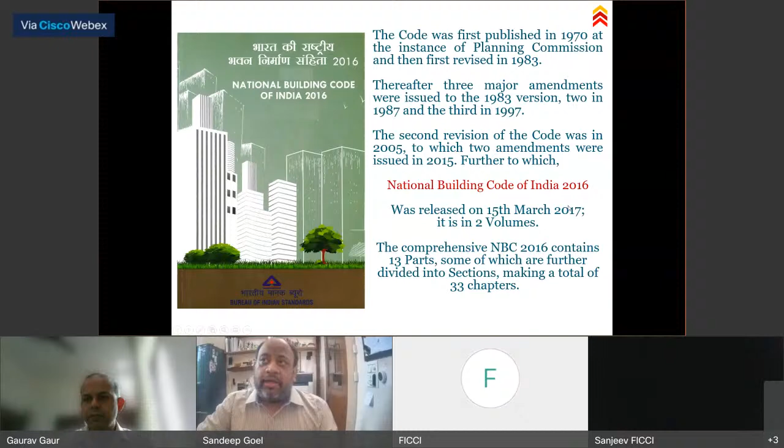The very important thing about the NBC is that we now have huge documentation with respect to figures. We were earlier with 6 figures, and today we are on 16 figures and diagrams in the new revision. We had a 3-plate terminology, and we have now moved to a 6-plate terminology.

When I started working on this, in discussion with colleagues, we realized that terminology is such an important part in fire engineering. People sitting in India, architect colleagues, used to say fire corridor, fire path, fire route.

If we start using these kinds of terms, they are not globally recognized. So we have to start using terminology which is more correct with respect to the global way we talk. That's what the code looked at in improvising the terminology.

Terminology is English. If you do not know the right terms to use in a conversation, your system is not going to work. All of us know software to some extent. If you do not use the right syntax in making software, the computer does not give you the right outputs. Similarly, engineers, architects, users, and system integrators have to use the right terminology.

We also realized that India is a moving country, and we now have atriums, commercial kitchens, car parking facilities, metros. So now it is time that these important occupancies in buildings come up with their own requirements highlighted. So the code committee intended to include more annexures, what you see on the screen.

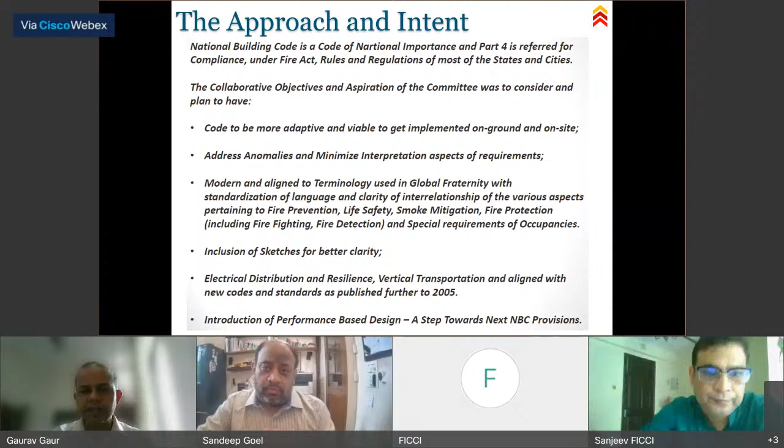Gauravji, what time should I stop? Can you tell me the timeline so I keep my watch? Yeah, sure, so as per the agenda, you have to finish by 2:40. So from 2:40 we can take some questions.

Thank you, Gauravji. So this brings better clarity towards the speed we have to talk about. Now you see the code is very clear with its objective. We have talked about fire prevention, and in fire prevention, the code looks at 3 basic fundamentals.

Fire prevention means you should do a system with which, to begin with, fire should not occur in the building. That means you should do the right electrical design, use the right materials in the project, and use the right type of structural rating into the project, so that by and large the fire itself is prevented, is not happening in the building.

Now, these are various things with which you can prevent fire from happening in the building. If you are not storing combustible material, you are using the right type of gas distribution network, you are using the right type of interior finishes, all those things will prevent fire. An inefficient electrical distribution system is one of the biggest culprits where fire occurs because of poor electrical design. But if you are doing a good electrical design, your fire will not occur.

Now, God forbid, the fire occurs. The next thing to look at is life safety. We should not lose human life. People's life is valuable. We all realize, specifically COVID has made us realize how valuable one life is, and what kind of grief it brings to the family if we lose a person in such a calamity. So life safety is very important. Most of us take it for granted that we are safe in the building, but life safety is one of the most important things. In the blueprint of the design, if life safety is not handled carefully, it will affect the functions of the building.

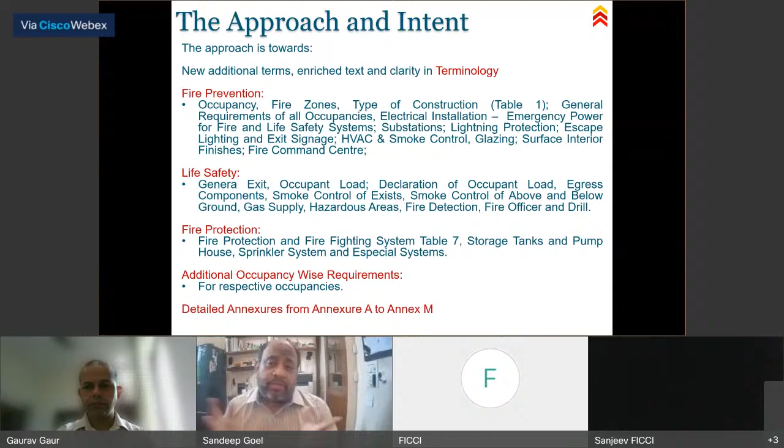Now, having said that, the NBC also gives very good importance to audits and drills. If you do not do the audits and drills correctly, it's like not being careful about your own health—if you don't do a blood sugar check or keep track of your heart condition, you can run into a problem. Similarly, the NBC has specific requirements for audits, drills and evacuation, with additional requirements for high-rise buildings. These are some of the best things built into the NBC.

So as a stakeholder, I think it's our duty to also look at the guidelines for evacuation and keep practicing them in our day-to-day activities. But what is the real picture?

So when you're in an aircraft, from the pilot to the air hostess to the people on the ground, all of them are responsible for the safety of the aircraft, not just the pilot. So you don't just say the architect is the one who's going to take the lead—I think everybody contributes in their own significant ways to make the building safe.

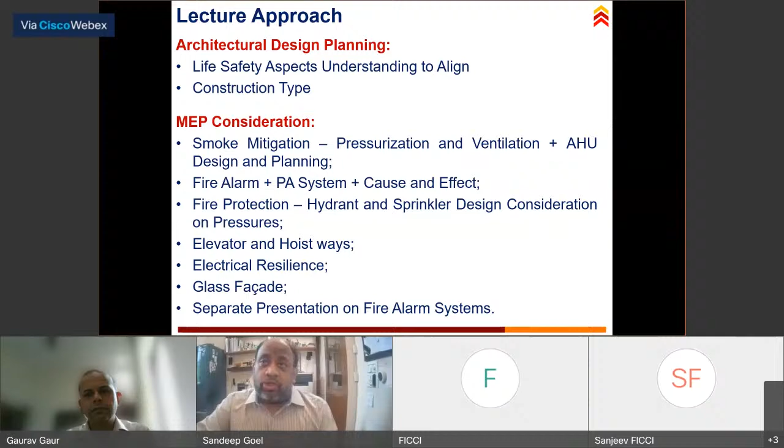So I think as passionate stakeholders, a lot of us talk about smoke mitigation. A lot of my colleagues always talk about smoke being the biggest killer. I think, to my understanding, a wrong announcement, an incorrect announcement, or not making the announcement at all is a bigger killer than the smoke itself. Because if you are able to provide the right type of announcements, you are able to control the human movement into the building. Now, once you are able to understand the life safety aspects, then there are active system aspects.

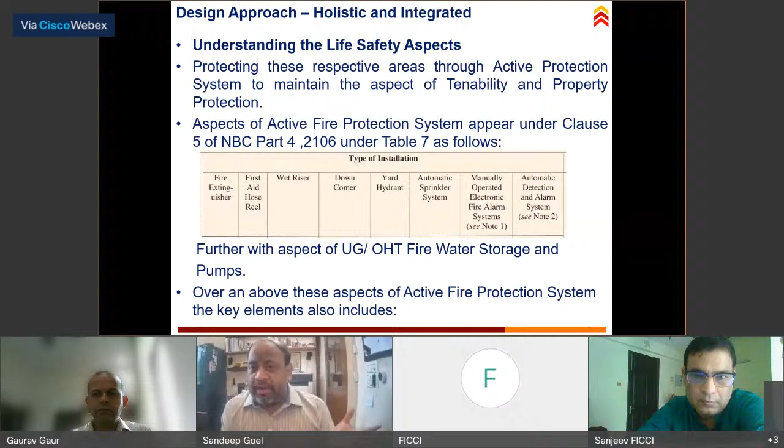Life safety as far as active systems in the code is concerned is much easier. It's a prescriptive requirement: go to table number 7, check the type of occupancy, check the height of the building. There are different types of installations - extinguishers, hydrants, sprinklers, the type of fire alarm system you have to provide. Put all of that together and you can find out the active systems which have to be provided in the building, which the National Building Code very clearly highlights.

Of course, we do talk about electrical safety. One of the other topics which I feel we should be very passionate about is emergency lighting and exit lighting. We take these things for granted, that emergency lighting or exit lighting has no value in a building. But believe me, when you are in a building and there is complete darkness because of a fire which might happen, the only saving grace in an auditorium is that exit light on top of the door. That's the most valuable thing to see in that auditorium.

Similarly, in any facility, if your exit lighting is not correctly placed, believe me, at that kind of time the only safety you can get is by knowing the passage which will tell you where to exit from. So these are some of the things.

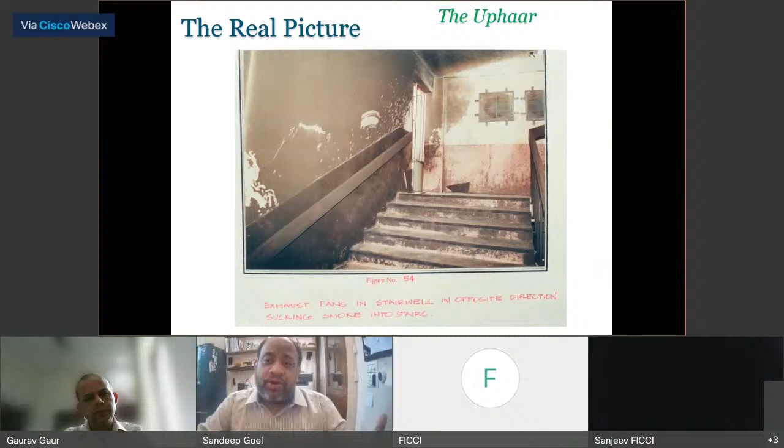You see this Uphaar tragedy which happened. In this Uphaar tragedy, the engineers were told you have to pressurize the staircase. Now, when you have to do the pressurization of a staircase, what do you do? Provide a fan. So the engineers, in their wisdom, provided the fan in the opposite direction. They just knew that you have to provide a fan. So they provided a fan in the mid-landing of the staircase, Gauravji. It led to the smoke from the auditorium being sucked into the staircase. So it was, in fact, a reverse of the damage you should have prevented.

So these are some of the things.

Another classic example: if you have a fire door and you keep a door stopper on it, the fire door has no meaning because fire from that space will enter the staircase. We realized these problems, so the National Building Code introduced a warning that a fire door should not be kept on door hold open. It has to be closed. Door stoppers are not allowed, because people did innovative things like providing a door stopper on a fire door, defeating the whole purpose of providing a fire door.

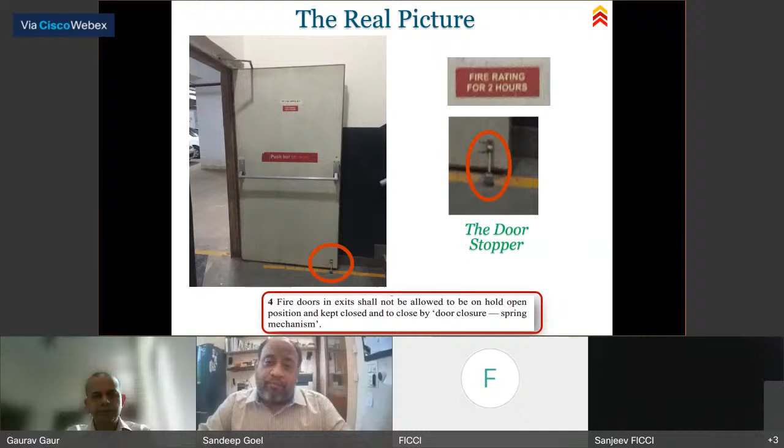If you look at an exit, in engineering terms it's a staircase. The architect must provide the right number of exits, their width, and their locations. The structural engineer provides the right structural integrity to the staircase for people to use it for 2 hours. The interior designer uses the right materials for construction inside the staircase. The mechanical engineer pressurizes the staircase to ensure smoke does not enter. The electrical engineer provides lighting inside the staircase so you don't topple or fall down. And the firefighting engineer provides sprinklers and seals these spaces so no smoke enters.

So all these stakeholders are contributing together to the safety of the staircase. Can we say we don't need one particular person on the project, that we can manage without them? It's like working together for the success of the project. An electrical engineer is as important as a structural engineer, who is as important as an architect, because when everybody gives their contribution, we meet our objectives.

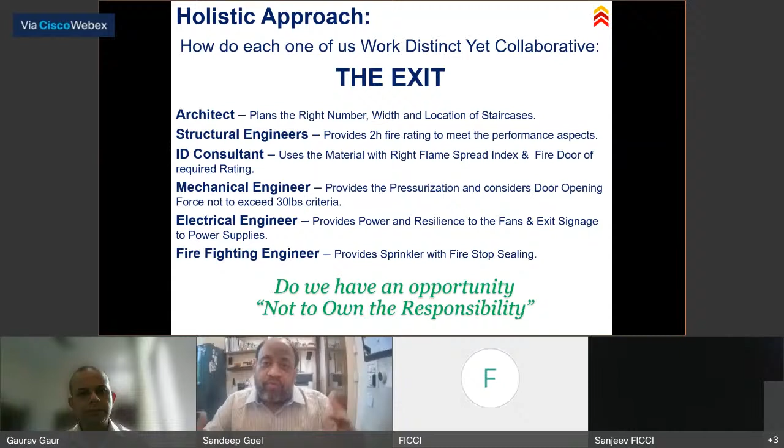I'll take you through the fundamentals of fire safety as per the National Building Code of India. We have something known as exit access. What is exit access? You are in a building, working in your office on a computer, or inside a restaurant eating food, or imaginably in a school studying. You are in a space where everybody is collaborating and working together.

But when there is a whistle during a fire drill and you have to move out of the building, what do you do? From the space where you are working on the computer in your office, you start walking to what we call the exit. And what is an exit? The exit is this red box - it provides you the complete mechanism to come out of the building from the 14th floor to the ground floor. So I always narrate that an exit protects you like your mother and brings you from the space of concern to the ground floor, protecting you from all eventualities of exposure to fire. As per international codes, if you're in a building on the 18th floor, when will you be safe?

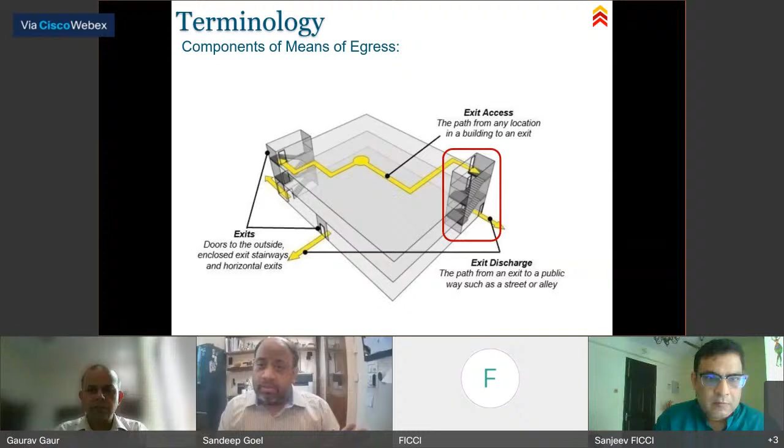The answer is: you are safe when you are inside the staircase. Very simply, if you are able to go from your office where you're working on a computer and walk across and enter the staircase, you are in a safe zone - as long as that staircase door is closed and not open. So what happens is you leave the evil behind; you get into the staircase, the door closes, and the evil, the monster, is behind you, but you are in that safe zone from where you can come down to the ground. That's why we should learn to respect the exit.

If you put LPG pipelines, mattresses, go and smoke in the staircases, and leave cigarette butts over there, those staircases will not help you at that juncture when you need them.

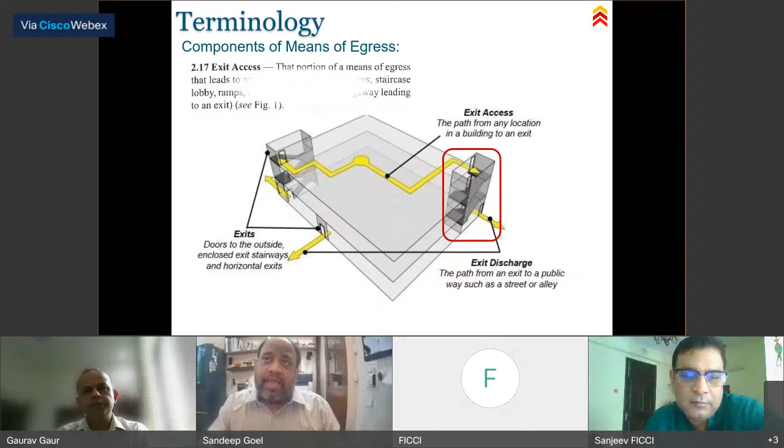They will become actually incapable to bring you to the ground. So in that spirit, this is the staircase, as long as you are able to reach the staircase from your place where you are, in the safe zone.

Having said that, the National Building Code further describes that if you have got 10 staircases in your building, out of 10, 5 staircases should go directly outside or use a passage to go outside. Today, you go to many buildings, when you come down on the ground, you land into the lobby.

Now, Gauravji, I'll ask you, God forbid there is a fire in the lobby. Where will you go? You are already into a space which is on fire. So let's imagine that you have got staircases, what you see on the diagram, are able to go out.

In case there is a fire in the lobby, the PA system announces for people to use the staircases by numbers. Staircase number 3, 4, and 6 to be used, please go out. That time you prohibit or discourage people from using those staircases which, if they come to the lobby, will have eventuality of people being exposed to risk.

So as I said, if you name your staircases Saraswati, Vandana, and Varanasi, you are able to say, please use right now these staircases for exits, because the staircase which brings you down to the ground has risk exposure. You are able to make a more effective PA communication. So that's how the whole thing has to work, not just on blueprint, but in practice.

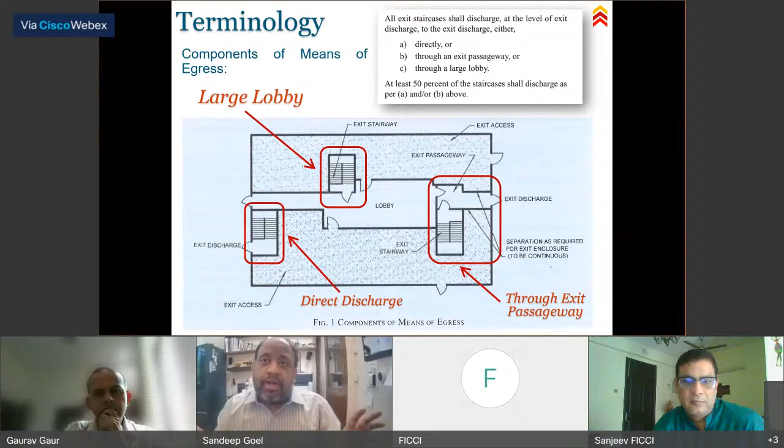So the National Building Code tells you, Mr. Gaurav, if you are an architect and you are doing 10 staircases, please bring 5 staircases outside directly. So that if there is a problem, I'm able to bring those people into those 5 staircases so as to avoid the risk of exposure to them.

The science and the engineering of doing the measurements. Architects come to us and say, Mr. Goel, I would like to do a travel distance the way it has been shown on a diagonal path. I said, sorry sir, in real life, that's not how you're going to walk.

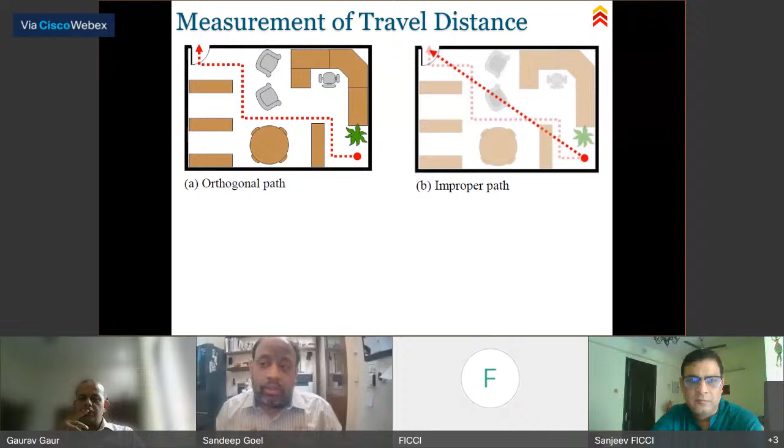In real life, you will go as per path number A because you'll have furniture. He said, but I don't have the furniture. I said, you may not have the furniture, but are you not truthful to your design? Can you not do a measurement like this for me? If you measure like this for me, it means that I have certain respect in my travel distance measurement.

I'm not doing a random check. I remember a lot of colleagues on the panel over here would remember most of us used to draw circles for travel distance. Absolutely incorrect. Then we started moving towards a diagonal approach. Not much better, but the most correct approach would be when you do 90 degree connections, as we see there.

Now this is on exits, but I would like to introduce something very important for the code over here, Gauravji, fire tower. It will be very interesting to talk about, I've got about 10 minutes left, something on the fire tower.

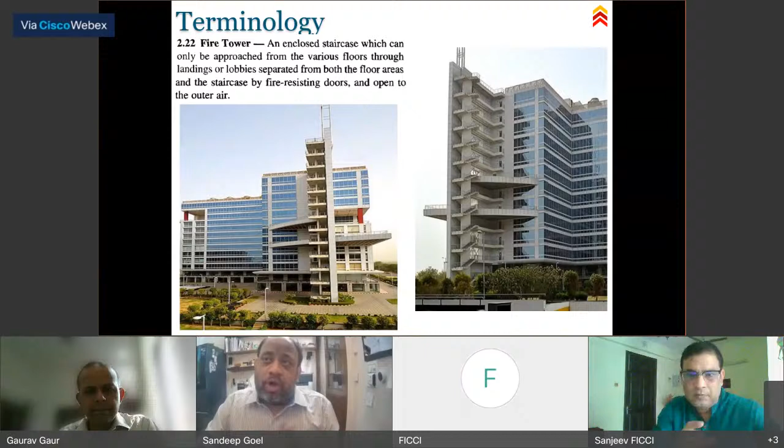Fire tower is what you see as per definition. If architects were to make, as per the old National Building Code, they will have to reproduce this picture 300 times. That means all the buildings should have this kind of a picture. Now, this is not possible to do. So what we realized is that we are giving something which is impractical.

And we publish that in the code. We give it to Mr. Gaurav, who's an architect, and we tell him, please abide by the code. And Mr. Gaurav says, your code is so impractical that I can't do it. And then Mr. Gaurav does not do it. Then what happens? God forbid, there is a fire in the building which Mr. Gaurav has designed. That day, the whole bureaucracy is after Mr. Gaurav, saying you did not abide by the code.

Now, Mr. Gaurav says, sir, there are other 20 buildings which do not abide by this code. They say, I don't care. It's like the traffic light. You jump the red light, you are caught. Other 5 people are jumping. They say, forget about them. You are under the bar because you have not taken care of safety at your end. So we realize those things.

We changed the National Building Code, realizing that external limitation of people to go up a staircase in a fire tower is not possible. We realized globally, fire is fought from inside the building. It is never fought from outside like a Superman, moving around the building like a Spider-Man trying to douse the fire. You have to be in the core of the building to fight the fire.

So we introduced a concept known as the firefighting shaft. What does a fire tower have? It's got an elevator, it's got a staircase, and it's got a lobby.

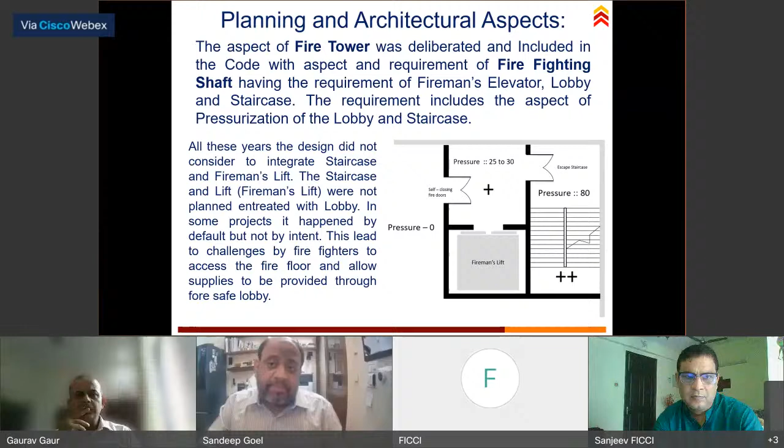So in today's lecture, Gauravji, a very meaningful approach which people could carry into their design is this. I'll explain how we are passionate about a fire tower. Very easy to understand. You have a staircase, an elevator, and a lobby. Now these three things work together, and they work together beautifully. There's a lot of text here, but I will explain this to you.

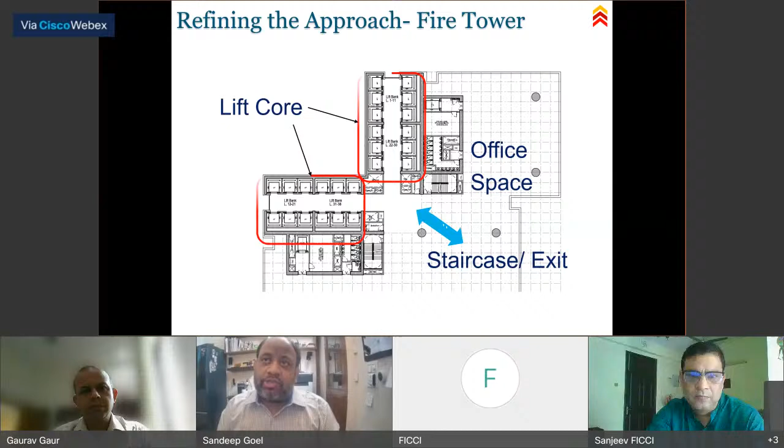Let's imagine a scenario where my client would have done this design. They would have told me, Mr. Goel, here is your lift and here's your staircase, can you give me a signature? And I said, if I do this, what am I doing?

So tell me, is this design correct? The fire hose cabinet is outside, the fireman is inside the staircase. He enters into the space, takes the hose and starts fighting fire. Not possible. So we changed it.

Once you have staged yourself, you enter into the enemy zone with your PPE kit. That means outside the COVID ward, there is a vestibule where you change into the PPE kit and then enter into the COVID ward. You don't enter into the COVID ward and then start wearing your kit. In a similar way, we created a staging area.

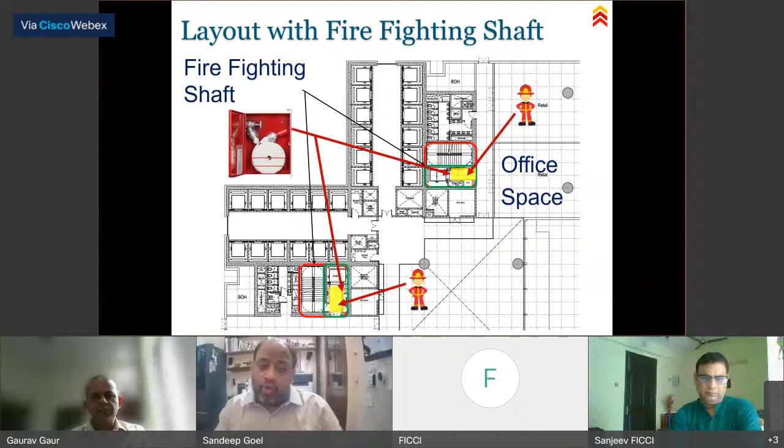Once you've done the staging area, the elevators are set aside. These elevators, which you see on the diagram, are used by the firemen to go up and down. Now if you are a fireman, Gauravji, and you have to go to the 15th floor and you run out of your breathing gas, do you tell your colleague to go fetch the apparatus from the ground floor? He won't do that.

What do you do? You tell the control command, my name is Gaurav and I need a breathing apparatus, please provide me. How do they provide it? By elevator. The elevator brings you the breathing apparatus on the 15th floor. So once you get it, you come into the staging area, take your breathing apparatus, and go back into the area to fight fire. So it supplements your requirements.

Had you been in a scenario like this, you are already in a burning space. How can you stage yourself? When you do what we call a terrorist attack response, we provide a cover. So where is the cover provided here? That cover was introduced in this space. And what happened? This is the staging area, this is where you stage yourself before you enter into the enemy zone. And that's what the fire tower did.

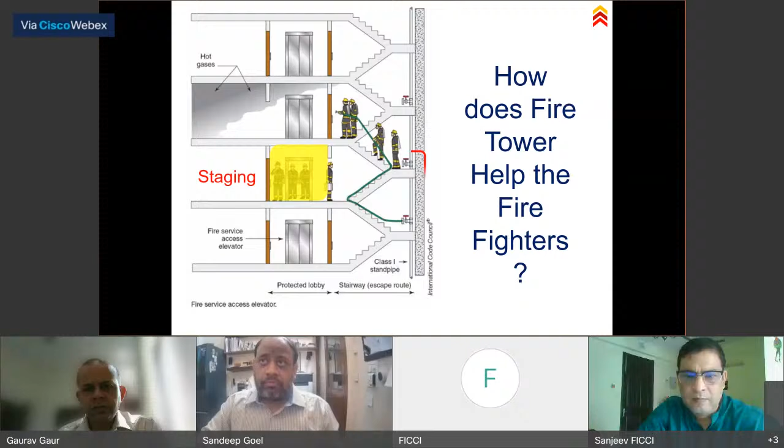So we took the hydrant from here and entered into the fire space from a staging area. That's what we picked up from the British code and introduced. Today the American code is looking at it very seriously, although the Singapore code also has something we have already prescribed in our code. So this becomes your staging area, and then to add to it, we have connected the refuge area. So I ask you one small question, Gauravji, maybe you're not able to answer me today.

If you are working in a multinational company on the 18th floor, in Bombay, Gurgaon, Delhi or Noida, and you are told you have a colleague who is handicapped, on a wheelchair, what are the directions given in case of fire? What do you do with that colleague on the wheelchair?

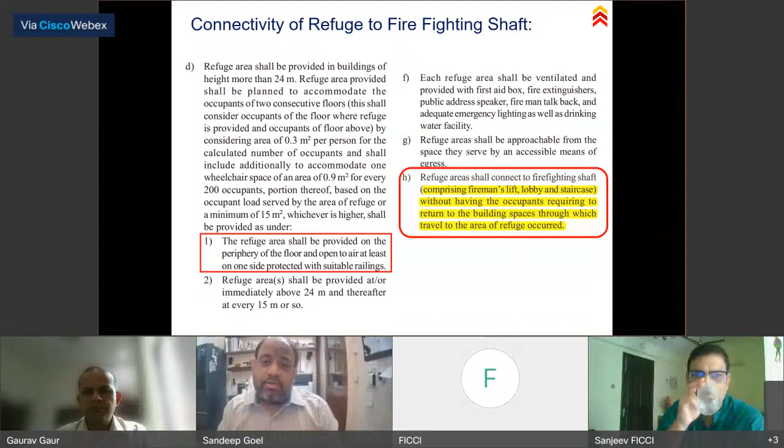We don't have answers for this today, but we have a refuge area. The code told Mr. Gaurav that if you have a colleague in a wheelchair, bring him to the refuge area and you leave the building, because I don't want you to be with him. The refuge area becomes a safe zone for a pregnant lady, an old man, a man on the wheelchair, who will then be assisted by the firemen to be brought down by the elevator I mentioned, Gauravji.

So in this picture, the red zone is actually the green zone where you can park yourself. Once you're in that zone, let the rest of the floor burn, because you are protected by the compartmentation strategy. You rest yourself because you're out of the evils of fire, and somebody will come and take your wheelchair into the elevator to bring you down to the ground. That's the fundamental of a fire tower and a refuge floor working together. They go hand in glove.

Coming further in my presentation, keeping the timelines, Gauravji - the National Building Code also told us about what we call tagging. Today you take pictures from your camera, and half the time my mobile phone shows me where my pictures were taken - when I was in Mumbai, when I was in Chennai - my pictures have geotagging. Today, what is your geotagging, Gauravji?

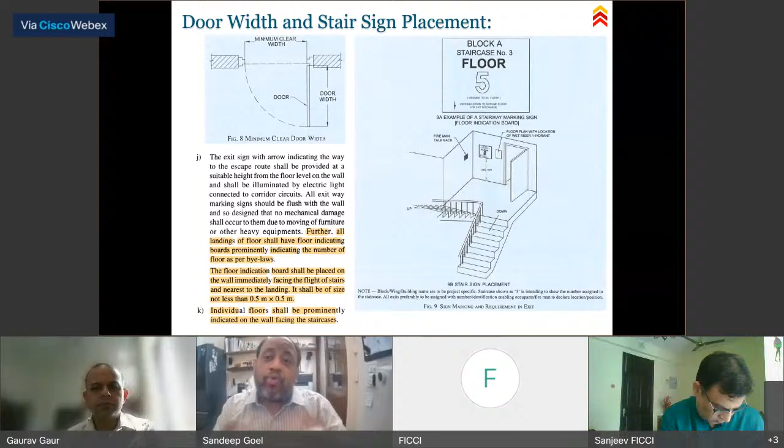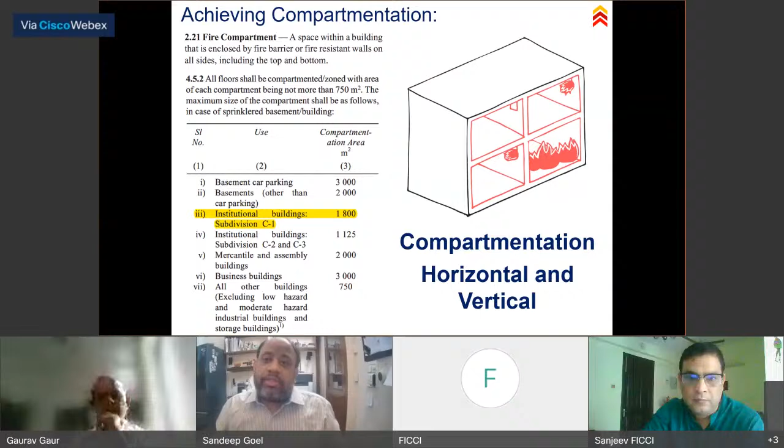Because when there is a fire, you have no clue which building, which tower, which floor you're in. So we started prescribing this kind of identification for people to inform where they are. Compartmentation, as I told you, we are very passionate about compartmentalizing the building, so you have to have a Lakshman Rekha. God forbid there is a fire in a zone, it should not spread horizontally and devastate the entire floor - that's another fundamental of compartmentation.

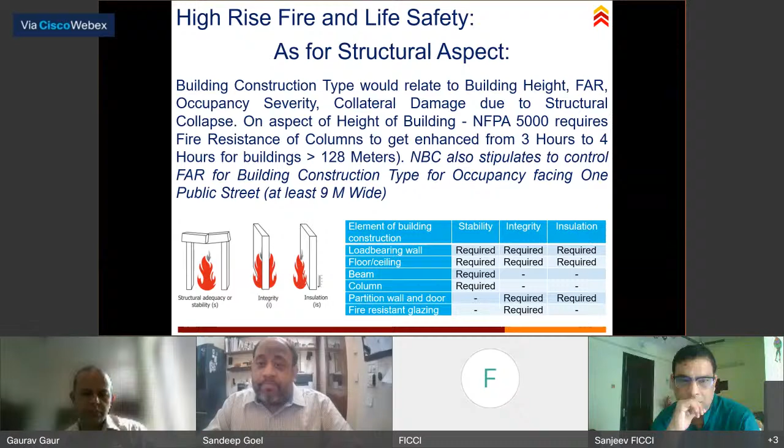You also provide compartmentation through fire curtains and doors, which can be discussed further with architects and planners. Structural components are very important in a building. We need to understand a tall building can collapse if it does not have columns of correct fire rating. So the code prescribes fire ratings for columns, beams and slabs, so that despite the fire, the building should not fall apart, and there is enough time for the fire to be fought. Structural integrity is another important topic.

We talk about smoke mitigation - I'm left with about 3-4 minutes, Gauravji. Smoke mitigation is very important - controlling the smoke. Importantly, in smoke management, we provided this table.

So as an architect, you tell me, Mr. Goel, I've got a lift lobby - I'll tell you what you have to do. I've got a staircase - I'll tell you what to do, whether your staircase is with an external wall or it's internal. Various permutations and combinations have been prescribed in the code, making it easier for the user to adapt to what the code says.

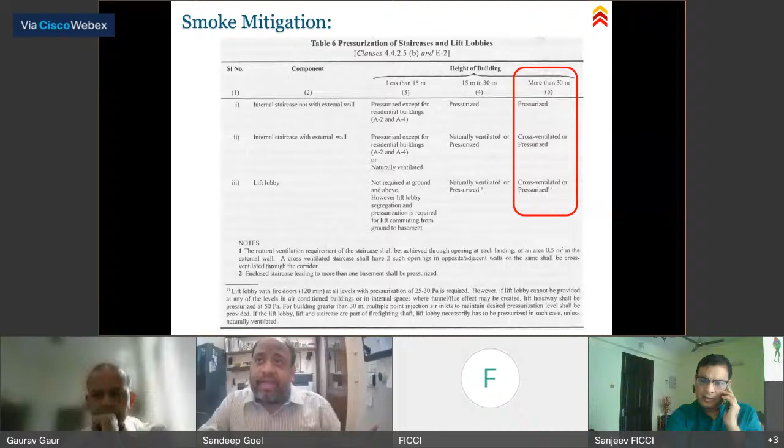Unlike NFPA 92, which is a lot of performance-based design, in our country we plan to do more prescriptive design, because people will not be able to adapt performance-based design so easily. That's why we have looked at prescriptive design. We have also provided schemes for auditorium smoke venting, showing how smoke from the auditoriums is taken away.

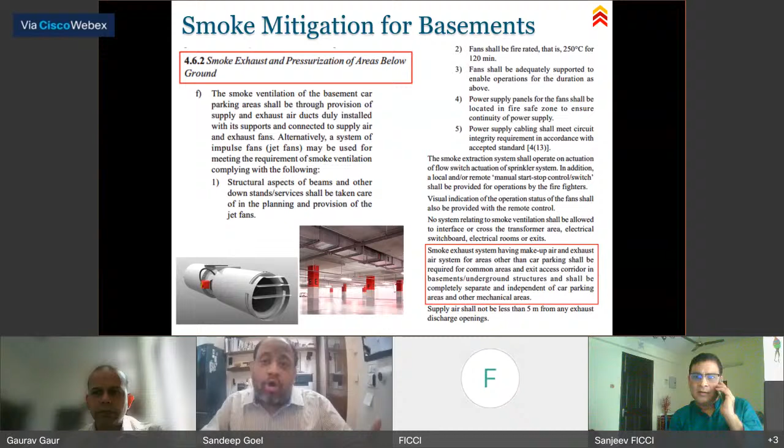Smoke mitigation for atriums - atriums can result in a lot of smoke which can build up. That has again been picked up from international codes and prescribed, because smoke is another important topic to talk about. We have talked about smoke mitigation from basements, because basements could be huge car parking areas which can offer a lot of fire load.

So smoke has to go out from the basement, because we have to make sure the firefighting operations are smooth. I talked about fire alarm, Gauravji, and I said fire alarm is very important. Fire alarm is like buying an expensive phone and not using its features. Today we see detectors everywhere, but if the detectors are not working correctly and not programmed correctly, all that investment is gone into no investment.

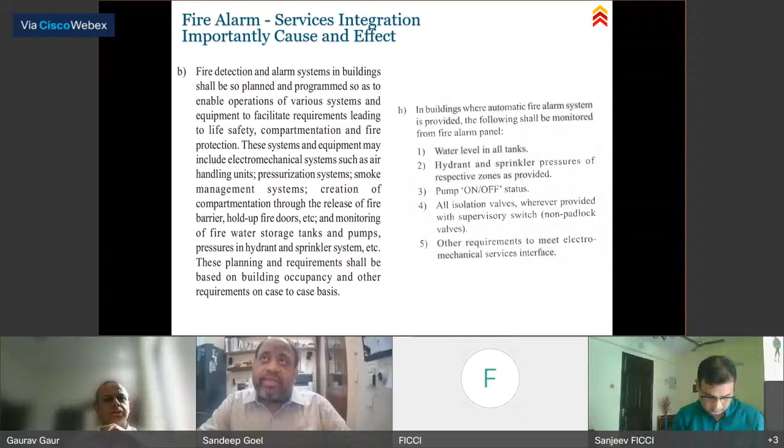So the code has itself prescribed what kind of systems you have to provide for the fire alarm system. There is a matrix which tells you cause and effect - when I say cause and effect, it means if I punch you, you punch me back or you run away. So there is a cause and there is an effect. The code prescribes that if there is an alarm which happens, the gas supply should shut off. So that's why it's known as the cause and effect matrix.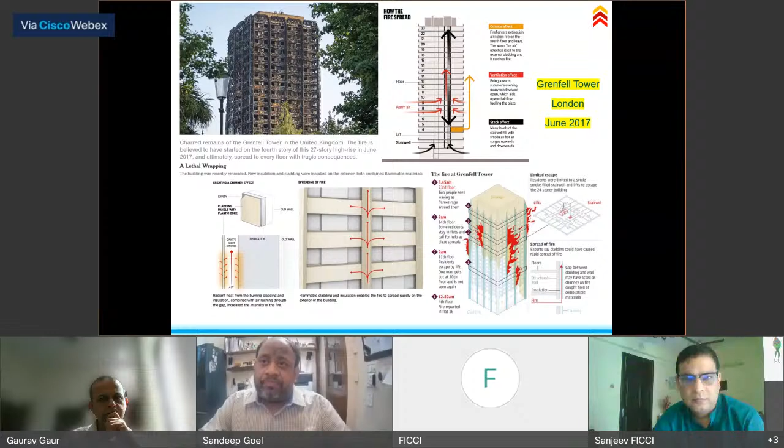The Grenfell fire, which was a case study in itself, had problems where flammable material were there in the facade. So that's where the Grenfell fire happened, and that's where we can do another case study and talk about it, Gauravji. And we have talked about providing sprinklers to cool the glass also in the code.

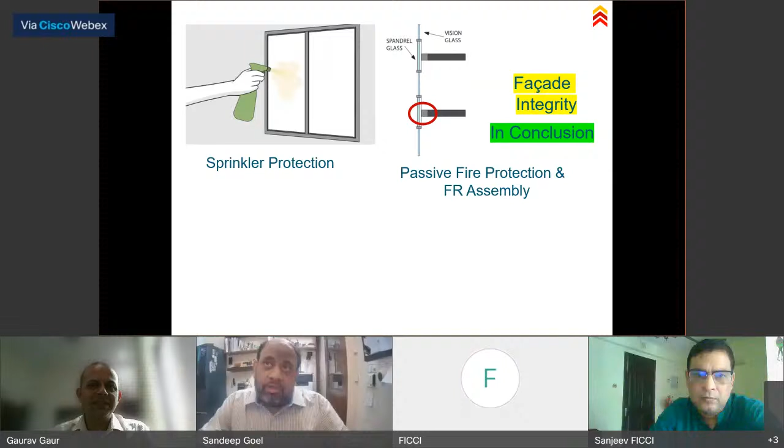So I feel if you have the right operational instructions, clarity and drill, we are in a safe zone. Today, Gauravji, I tell you for sure, our understanding about operational aspects is very weak in this country. We have to work together to educate, to understand the fundamentals. A lot of times people come to me and say, we have been doing this for 20 years. Well, if you have been doing it for 20 years, doesn't mean you're doing it right. It means there could be something which is wrong, and there's no harm in accepting that we have done something wrong.

I tell you, we should learn to unlearn and not live with what we have learned in all these years. So probably, as I say, this is my country, my people, and my code. We have to be passionate about educating each other and keeping a very, very strong eye about making sure we don't make any mistakes. And from there, Gauravji, I'm glad I'm 1 minute up on my time, but we can have a dialogue as you kindly permit me to take up that.

Thank you, Sandeepji, and beautifully covered all the important things, and that is what we expect when Mr. Sandeep Goel is speaking on a topic which is very close to you.

Some of the issues which you touched upon, even I as a layman can very well relate to. Like compartment strategy is a very old strategy, also used in Navy ships - compartmentation is a very good known strategy for that. And in case of fire also, he just showed us with some diagrams. Also, people always talk about specifications when you talk about installations of equipment and safety measures. But you correctly said that operational requirements are something we generally do not talk about, and that is where we are lacking actually. I hope that NBC has all those important things covered in it right now.

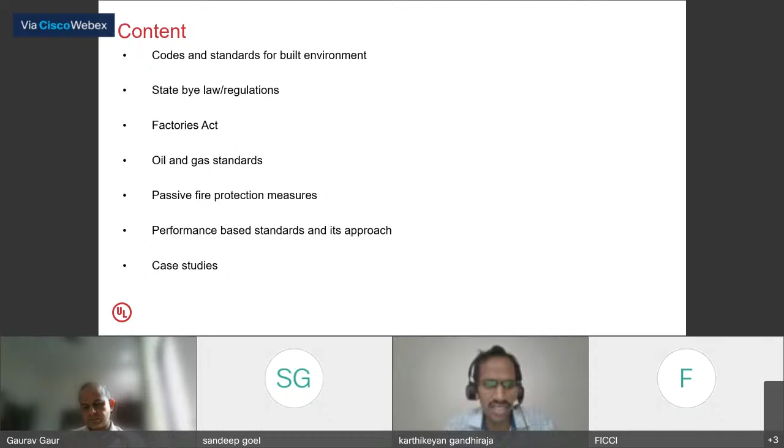Once again, very good afternoon to everyone. After a very wonderful session from Mr. Sandeep Goel, it will be very tough to touch on the fire safety norms again. I will try to go away from the topics we already touched upon, and we have another wonderful 30-40 minutes available, so we'll try to learn whatever is possible. This presentation's content covers codes and standards for built environment, and we will talk a bit about state bylaw regulations, Factories Act, oil and gas standards, some passive fire protection measures which are often overlooked as very basic things, performance-based standards and their approach, and some case studies based on our experience.

Why do we have to do a fire safety audit? This question comes often from the public and many fraternity people. It may be part of a pre-occupancy process—somebody built a building and wants to ensure the entire building is properly in place, well designed and well installed, so they do a fire audit. It may be in response to compliance, where they may be having issues with existing systems, problems with the fire protection system or passive fire protection system. Based on compliance, they can raise an audit requirement, and it is mandated, as rightly mentioned by Mr. Sandeep, that as per NBC, for all high-rise buildings, every 2 years a third-party audit has to be done for any facility. As part of a formal regular program, they can have it periodically, other than the mandate—once in 6 months or once a year, based on their infrastructure and building, anybody can plan. And very importantly, due to near-miss incidents or any latest fire accidents, that is a wake-up call that any building needs to be checked for aging building materials and aging building systems, which may trigger a bigger fire in the future.

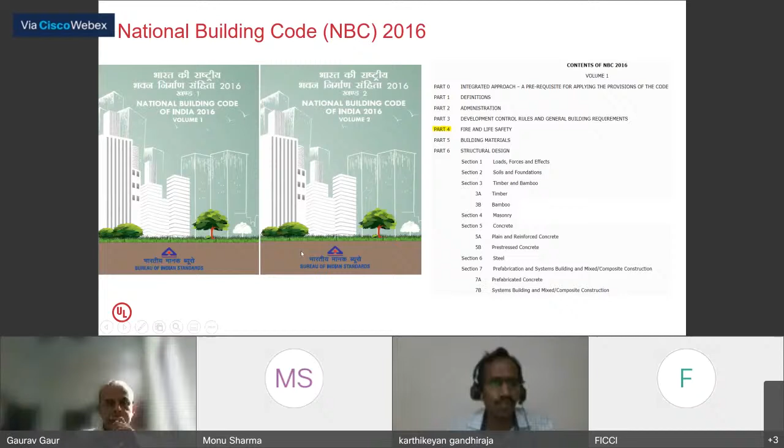Mr. Sandeep covered in-depth examples with the part 4 is our major lookout. We will try to even ask this question in the chat box, is that applicable.

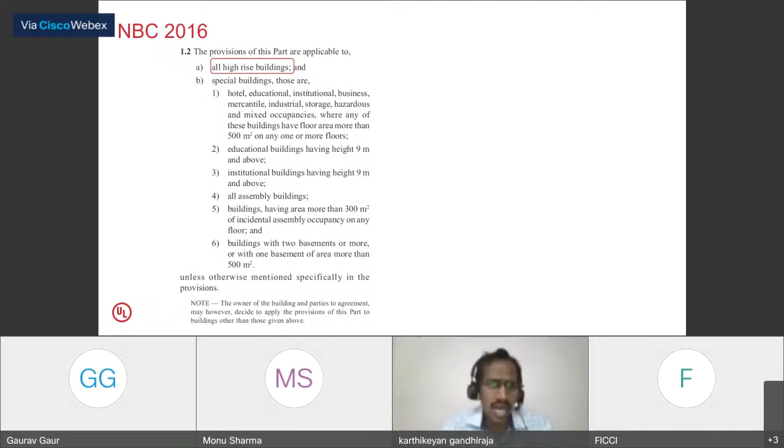I will try to give some examples - any high-rise building in India is required to follow NBC. It's 15 meters in height in general as per NBC, and a building having area more than 500 square meters needs to have fire safety norms followed, with height above 9 meters. Even an education building having 9 meters and above has to follow NBC.

Other than that, if any owner is building their own building which is lesser than 15 meters, the owner of the building and the party can however decide to apply the provisions of this part to buildings other than those. Even in this category, if you are willing to follow fire safety norms, NBC helps you out on where to install what.

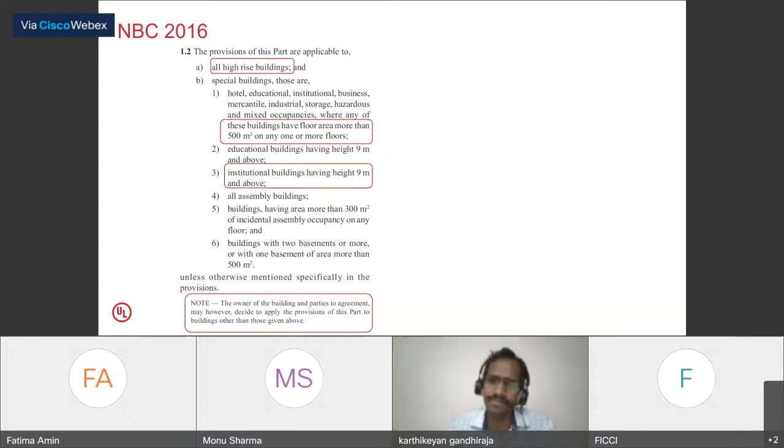The other aspect, before applying any code or even referring to it, is how to understand it.

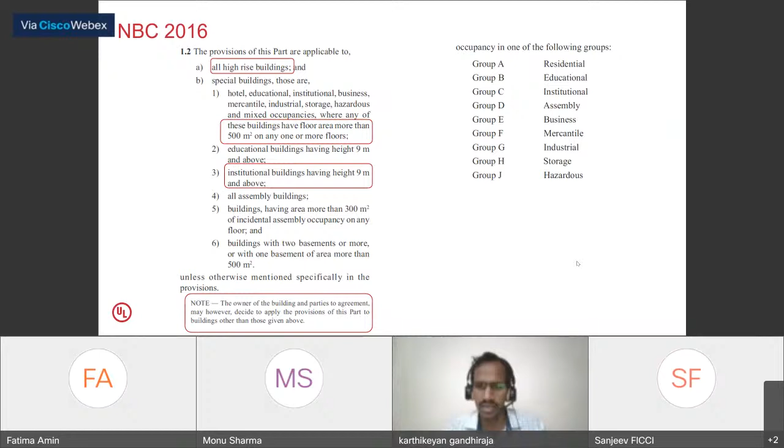Am I audible? I've been told voice is breaking. Hello, hello. Mr. Karthikeyan, your voice is breaking, maybe some network issue. If you can switch off your video, maybe that will help. I will try to do this in 1 minute. Seems to be some bandwidth issue, so you can try switching off your camera. Now please check, is that okay? Yeah, it is, it is better. Okay, thank you.

So when we select any building, we have to categorize the building into a different category. The categories are mentioned here from group A to J, and the NBC is mostly applicable for this, but predominantly it is applicable to residential. Then industrial, storage, and hazardous categories - we can also follow NBC and the Factories Act and other OISD kinds of documents in the lower group.

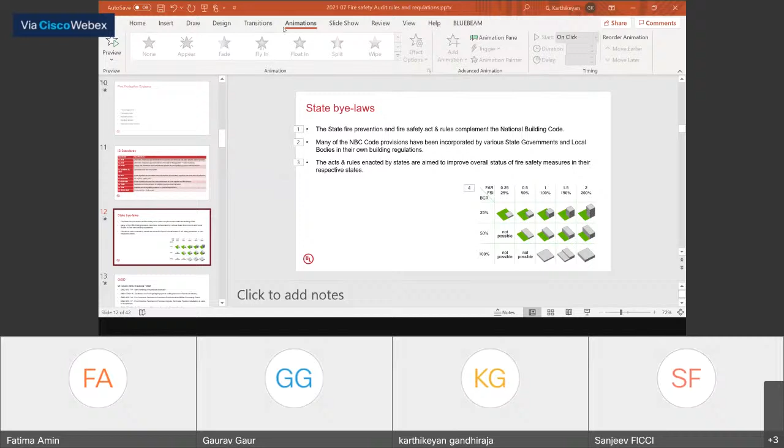Sorry, I think I messed up. Is my screen clear? Yeah, yes it is, now it is clear. Okay, thank you, thank you for everybody's patience, sorry for that.

So IS standards are most often used, for example, if you are buying an extinguisher and you don't know how to install it, where to install it, the type of extinguisher, and how to maintain it, how to test it, you need to follow the IS standard. For that, the right IS standard is 2190. If you go there, it will say clearly for ABC or A type or BC type, where to install, what distance one extinguisher is required, and how to maintain it, etc.

It's applicable the same way for sprinklers, which comes under IS 15105. Same thing for fire alarm, IS 2189 gives wonderful detailing on how to install fire detectors or smoke detectors in a building. Similarly, a lot of IS standards are available, more than 150, and what I've explained is all very basic. When it comes to pumps, IS 15301 helps with how to install it, a very basic and small standard as well.

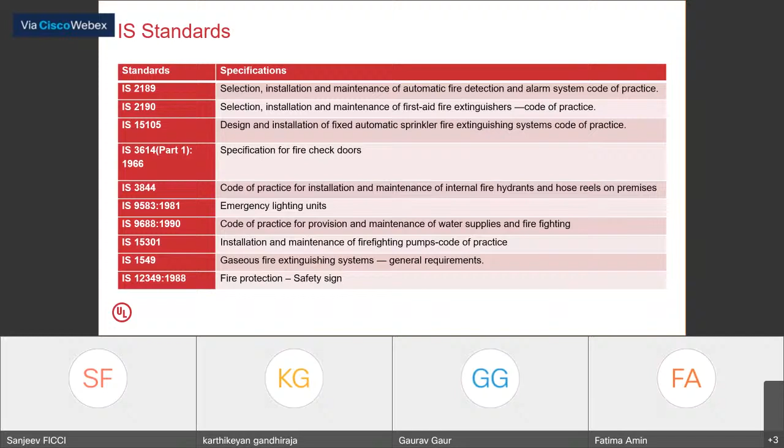So going into bylaws, bylaws take precedence when you have different documents and people have the question of which one to follow. You have a building, you're following NBC 2016 as your design standard, and you don't know which one to be installed, and you have a fire NOC, a state bylaw, and also the NBC. Out of these, your fire NOC takes precedence over all other documents. Fire NOC comes from the fire authority or enforcement authority, who gives requirements based on their infrastructure, fighting ability, and rescuing ability. So fire NOC has to be given first priority. Then we have to go to state bylaws. So what does the state bylaw do?

It ensures uniform development of buildings in any city, and public safety against noise, fire, health hazard, and structural failures. So all these things are covered within the state bylaws.

Another very important aspect is FAR and FSI values, very famous. Each city has its own FAR values, framed as part of the state bylaws. City population density is also stated or maintained based on the bylaws. The number of basements in any building is limited based on bylaw requirements.

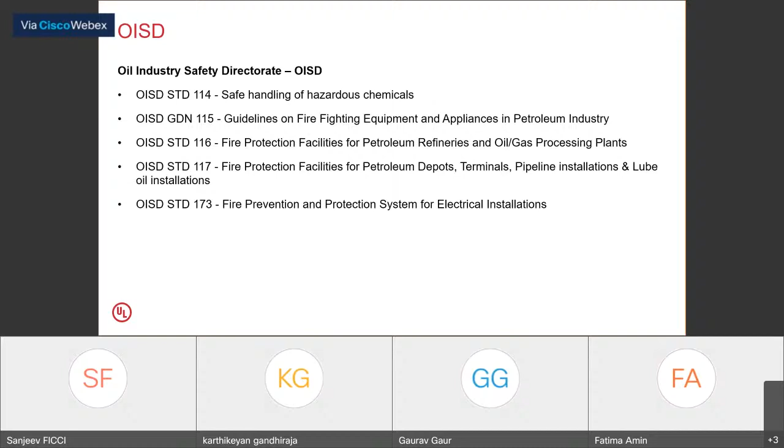Then we can understand the Factories Act 1948, which is the oldest act coming to fire norms, and it applies to most of the special economic zone factories in different states and cities. So what it says is that section 38 of the Factories Act 1948 emphasizes the obligation of the occupier, which includes adopting all practicable measures to prevent the outbreak and spread of fire, to provide safe means of escape, to maintain firefighting equipment properly, and to familiarize all workers with the means of escape during fire.

And train them in steps to be taken during fire accidents. The last one, section 37, also describes detailed measures to prevent explosion hazard. The state factory rules framed under the Factories Act have prescribed in detail all the steps to be taken to prevent fire hazard.

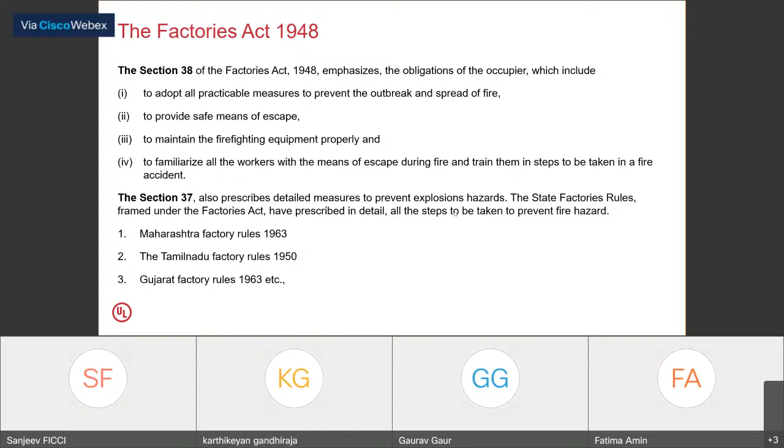So this is just an extract of some portion of the Factories Act 1948, and it has very detailed requirements for each type of manufacturing facility and processing industry. Each state has its own requirement. Maharashtra has 1963 factory rules, Tamil Nadu has 1950 factory rules, and Gujarat has 1963, etc. Even Telangana and Andhra have their own. So every state has adopted its own factory rules, applicable to their own statutory areas.

To give an overview of NFPA, it is a widely referred document in the fire industry. So I thought I would add one slide on it and give some perspective on NFPA. NFPA full form is National Fire Protection Association. When it comes to buildings, one has to follow NFPA 101, which is the Life Safety Code. This is the first document to refer to.

Then the fire code. The fire code is code of everything, which means it is also called fire prevention code, which means it includes most of all the chapters from different standards like 13, 14, 20, 25 or 70, 72. Any of these code extracts, you can find it in NFPA 1.

Suppose an inspector goes for an inspection, they cannot carry all the codes internationally, but they can carry at least the one code which touches base with all the codes, which is NFPA 1, a fire prevention code. NFPA 13 is widely used in India also.

For the pipe scheduling method, we use NFPA 13 for sprinkler systems, and NFPA 20 is also used for fire pump installation, and NFPA 25 is used for inspection, testing, and maintenance of water-based fire protection systems. NFPA 72 is a fire alarm and signal code, and it is one of the widely accepted codes even in the US.

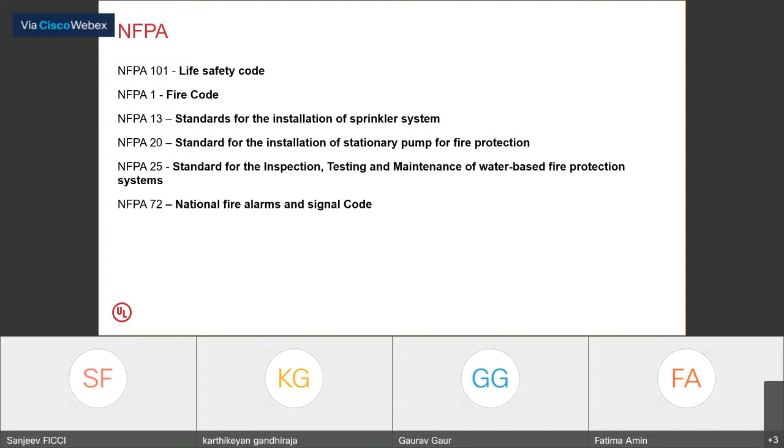It has got a number of reference materials about a gamut of fire safety information. NFPA 2001 is a standard on clean agent fire extinguishing systems. Today we see a lot of clean agent systems installed in data centers and other hubs, so these have to follow NFPA 2001.

So to give a perspective, any building can have multiple hazards, and this picture is from an NFPA reference which gives a detailed idea - an illustration of an airport, where each numbered and colored portion represents a different outlet, like retail outlets. We can see a dining area, a gift shop area, a ticketing area, and a loading dock area, etc.

So it's a perfect example of one application having multiple hazards. There is a kitchen there and dining there, each a different hazard. So when we apply our own code, even the mercantile portion comes under moderate hazard, dining comes under light hazard, and kitchen comes under moderate hazard.

Store is moderate hazard, basement is moderate hazard - I was trying to apply our NBC, or IS version, of hazard assessment. That's how I did this, and this way any building has multiple hazards, and each hazard requires a different fire safety solution. The density factors for different hazards will vary, and the sprinkler selection will vary.

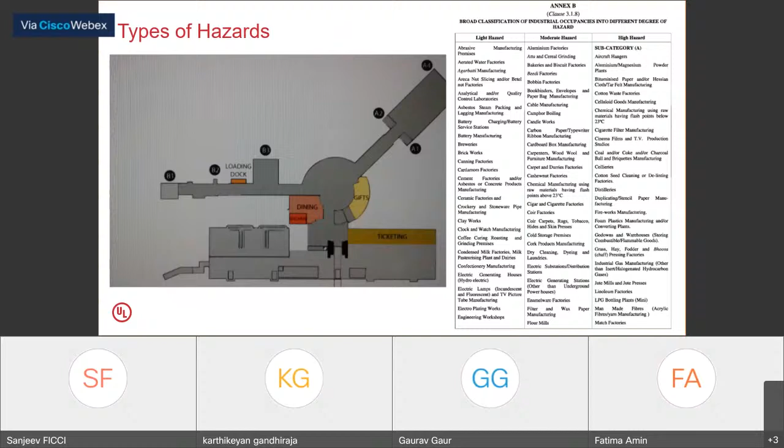So our code is more than sufficient when it comes to maintenance. People lack in terms of proper data collection and data maintenance, and they need to follow these kinds of requirements from IS, and they can maintain very well.

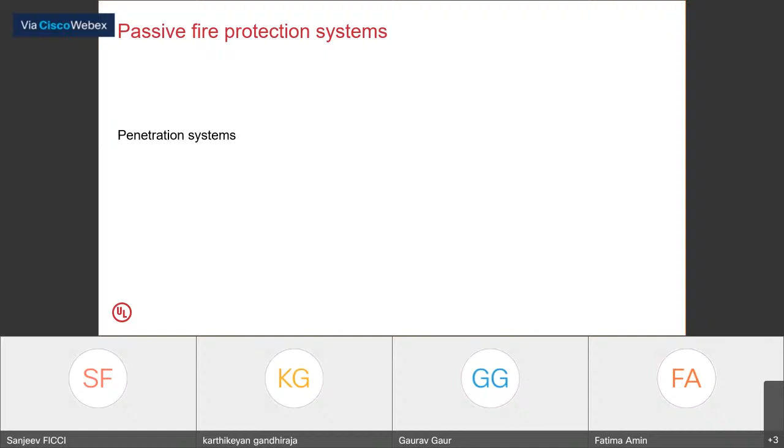Then coming to passive fire protection, which is widely a forgotten or neglected subject in India. There are many types of passive fire protection systems - the initial one is the penetration system, then there is the joint system, and there are wall systems, curtain wall systems, which are used in the facade. And there are technologies in this.

Before going to technology, there are three parts of a Firestop system which need to be understood properly. First is the fire rated wall - any wall has to be fire rated to apply the fire penetrant, and that is called the Firestop fill material. And the penetrating item itself has to be checked.

What is that material - is it a PVC pipe or metal pipe? So all three factors have to be considered: the wall, the filling material, and the penetrating item. So altogether we have to see whether it is a tested assembly.

Otherwise it is not going to give any result. Products do not have any rating, only a system has ratings. That's the message we have to take from this.

If architects or designers consider installing a firestop at a later stage, they have to consider during the design stage itself that the wall has to be a rated wall, the penetrant material has to be checked, and the filling material type also has to be checked.

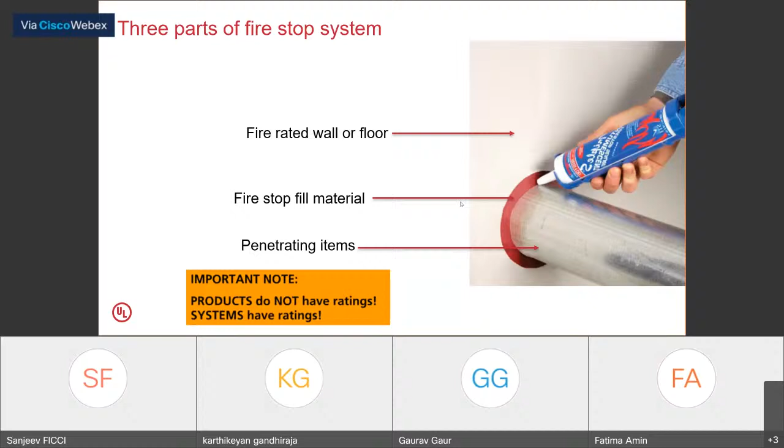Going more into detail of filling material, there are technologies available, like intumescent, which is widely used for material like PVC penetrant, any PVC conduits piercing through the fire rated wall. A good example is to use intumescent. How it reacts: before heat, it's in normal rigid position. Once exposed to heat, it bulges and covers the gap, filling the entire hole of that burned material.

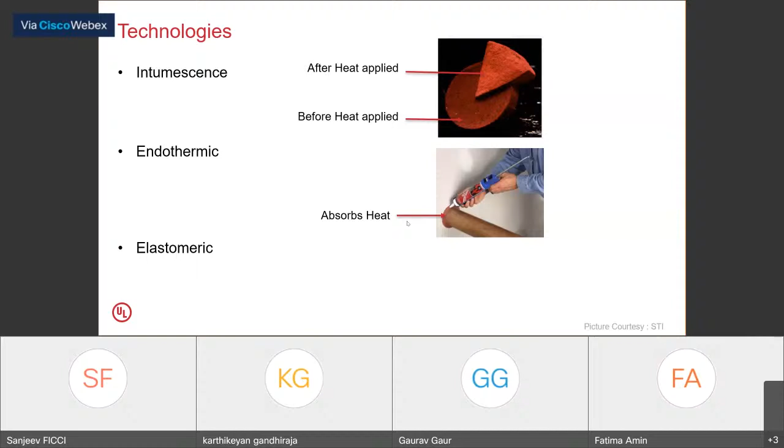The next one is endothermic technology, where the wall and the penetrant is installed, and the filling material absorbs the heat. This is primarily used in all metal pipes, or pipes which will not deform during fire. The last one is elastomeric technology, widely used in flexible areas like facade to wall to facade joints, particularly at the edge of the building.

There are many types of facades. I will try to give an overview of facade, since facade is today's hot topic, and most buildings have facade. There are different types of facade typologies.

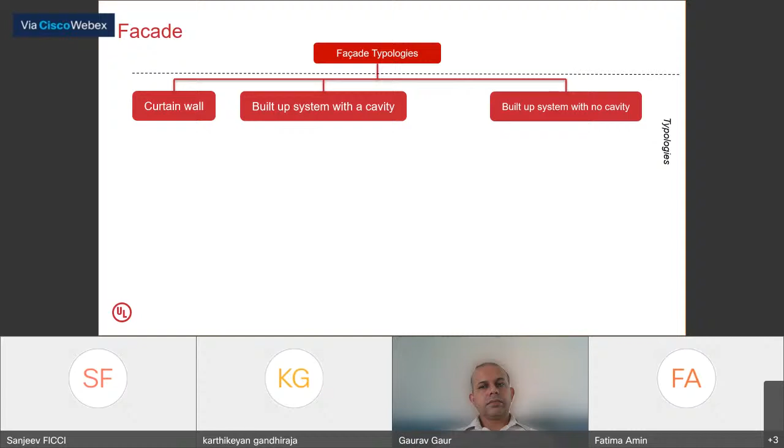One is curtain wall, then build-up system with cavity, then build-up system with no cavity. Curtain wall has further detailing like stick and unitized system. The build-up system with cavity is rain screen masonry, and build-up system with no cavity includes precast concrete, EIFS, ETICS, and insulated panels.

Mr. Karthikeyan, if you could conclude in say 5 minutes time. Yes, sir, definitely, I will rush through. Thank you.

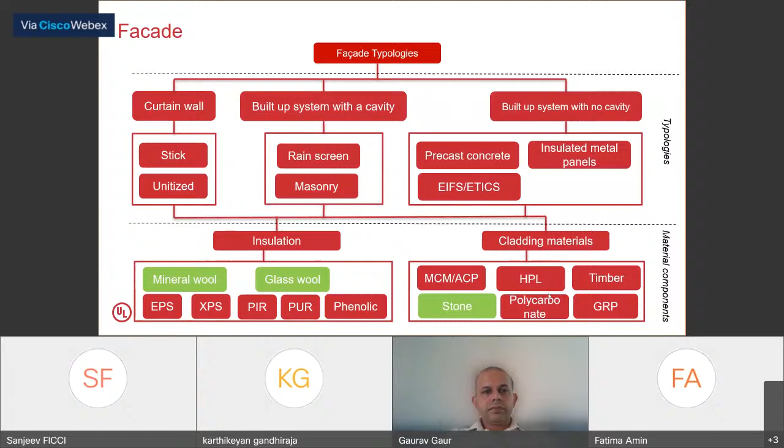There are two major materials in facade: insulation and cladding materials. You can see here the insulation - all the green materials are fire resistant in nature, and all the red materials are mostly combustible materials, both in the insulation and cladding category.

How it is done in India - some examples show the installation is not done properly, and people are using GI plates and unrated sealants, etc. Our NBC gives guidance that all gaps between floor slab and facade assembly shall be sealed at all levels by approved fire resistant sealant material, with a rating equivalent to that of the floor slab.

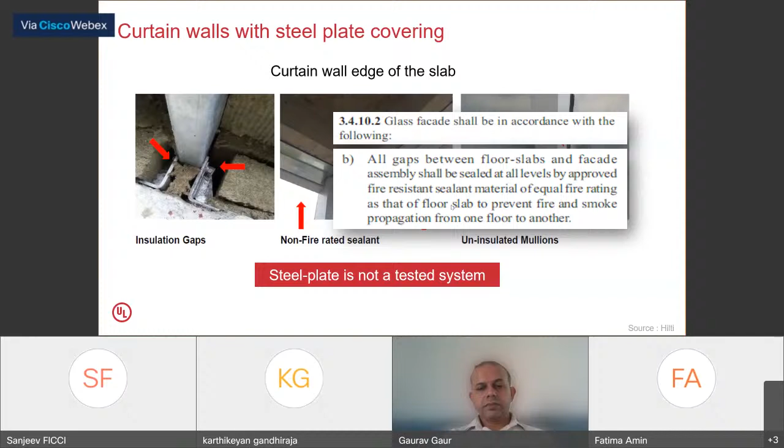Coming to study, once any assessment is done, it is reported like this, and the compliance summary will be given against these two, like against NBC and Bylaw. We'll summarize the compliance level where red marks are non-compliance, with the reason why it is non-compliant.

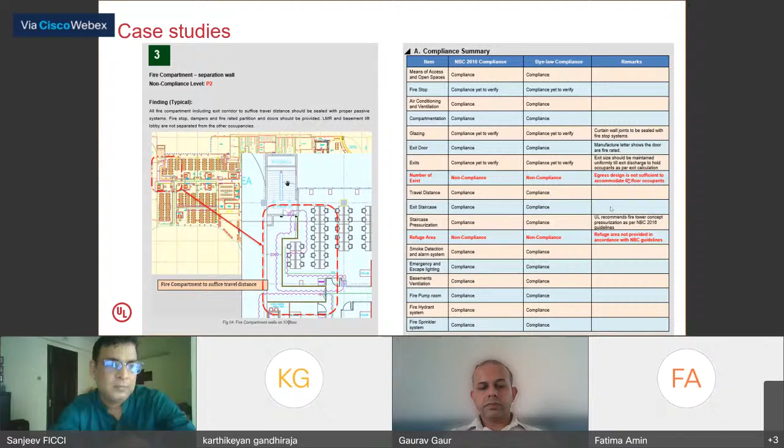A very important topic I will rush through - exception and deviation. Exceptions and deviations to general provisions of requirements of individual occupancies are given as applicable to each type of occupancy, starting from 6.1 to 6.9. This has to be applied where you have a building with a very special design.

And you want to apply performance-based code to that kind of building, then definitely this clause can be applied, and we can use the performance based codes and assessment tool.

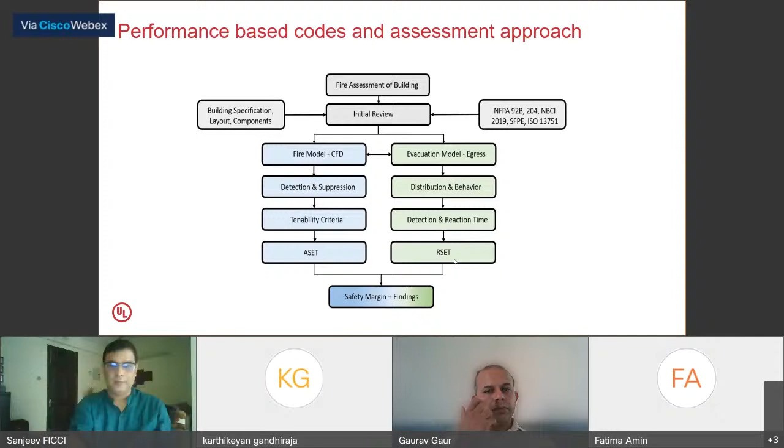So what tools are available? This is the general picture of how the simulation model can be done as an alternative. The blue portion is the CFD session, and the green portion is the egress session, and what we arrive at in the end is the available safe evacuation time, and on the right side what we arrive at is RSET, the required safe evacuation time, and by comparing both we identify the safety margin of any building.

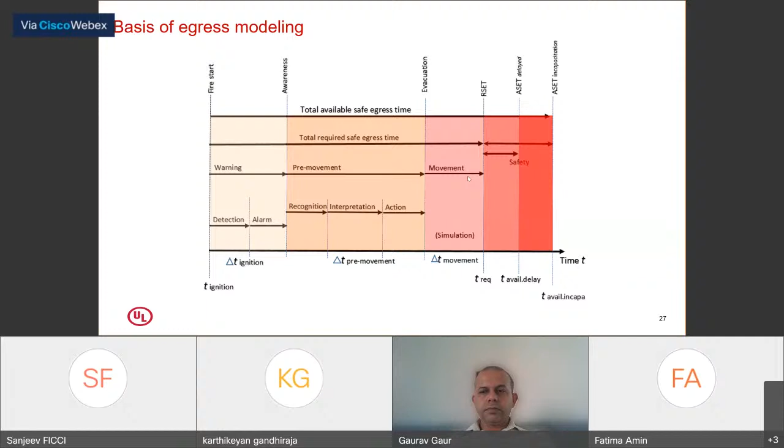So we can go to the congestion floor specifically, where the congestion is taking place, and address them independently. This example is directly from Mumbai, where hospitals are supposed to have a ramp, and this hospital does not have one, yet they got all approvals. Performance-based assessment is critical here, so that they know where the congestion is happening, how to remove the patients, and how they are going to create fire barriers.

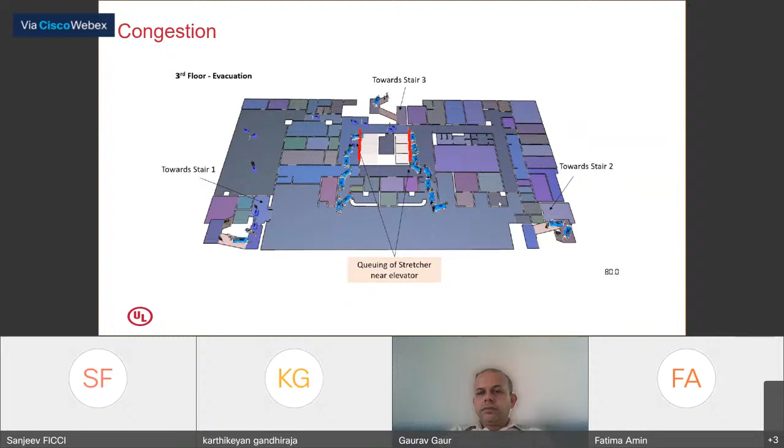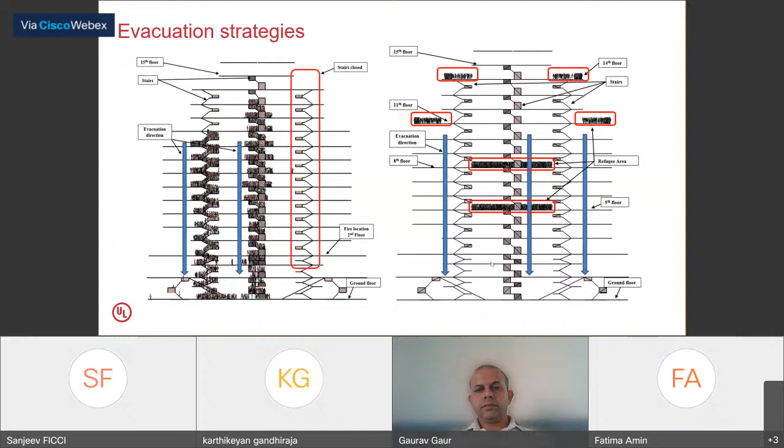So there are different strategies for any high-rise building: total evacuation, phased evacuation, and strategies like worst case evacuation by challenging the staircase completely, closing out the staircase to see how the building performs. It can be verified whether the refuge area can hold the entire population or not. After that, the entire result can be compared to determine which type of evacuation works for our building, or any building.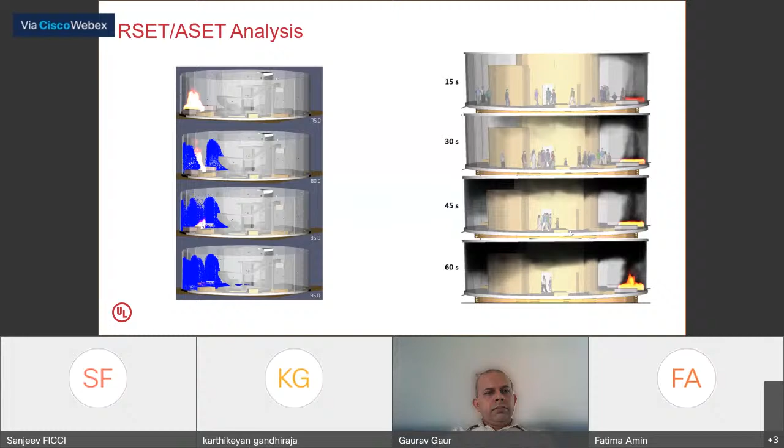Because this is a special tower which has only one staircase, where, as I mentioned, as a deviation, the code says this building has been built with one staircase. If only one staircase is there and there are hundreds of occupants, how safely are they going to evacuate the building? That needs to be checked with the help of technology, which is possible. That's what is being done.

And this is the result of that: how much tenable time is there, and what is the maximum time available. It's 83 seconds for the fire location, and the other parameters are fine. So visibility is a concern, and smoke layer height is a concern, and they have been given a number of recommendations that selection of material has to be proper.

So this is the final result of the RSET. Ideally the ASET has to be more. Here ASET is 70 seconds, RSET is 46 seconds. Hence the building is safe, but ideally if you have more safety margin, the building is much safer. So any modification can be done if it is in the design stage, or if it is an existing building, then retrofitting needs to be done.

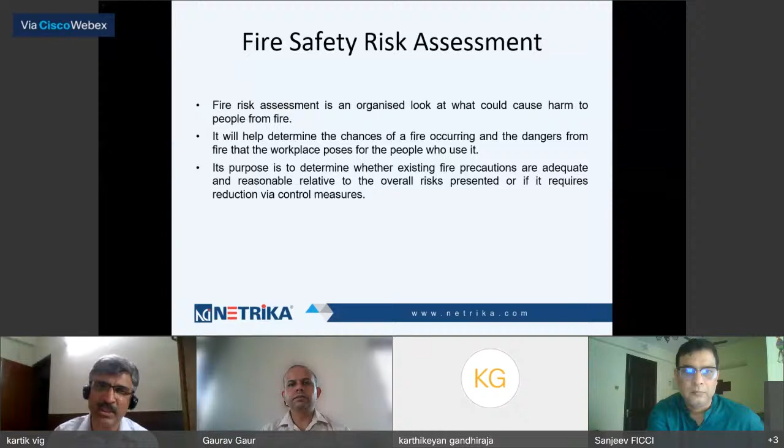It helps with determining the chances of fire occurring and the dangers from fire that the workplace poses for people working there - workplace, factories, even houses for that matter. Its purpose is to determine whether existing fire precautions are adequate enough and reasonable relative to the overall risks presented, or if it requires reduction via control measures. So your fire safety risk assessment is looking at achieving this as an end result, as an output.

And what do we understand from fire risk? There are a number of definitions that do the rounds. I find this to be simple, so I've put it across. Fire risk may be defined as the likelihood of a fire occurring multiplied by the severity of the fire - that is the harm potential, and consequences in terms of loss of life, fire spread, damage to assets, etc. Now what does harm potential constitute?

Harm potential primarily from a fire hazard depends on the development of a fire originating from the hazard - what are the chances, what is the likelihood that a hazard may lead to the origination of a fire, and the potential consequences in terms of loss of life, property, or anything else for that matter.

So when an assessor comes about and wants to carry out a fire risk assessment, what he's trying to do is determine the potential for harm, and make a judgment on the possible outcome of the hazard which he has identified, which may lead to a fire.

What are some of the points that should be considered? Potential for ignition, the number of times the situation could occur - how many times it can happen you need to be aware about. The factors that could cause it to occur - it could be the competence of people involved, it could be the environmental conditions, it could be the condition of the equipment also. All of them go into understanding the harm potential.

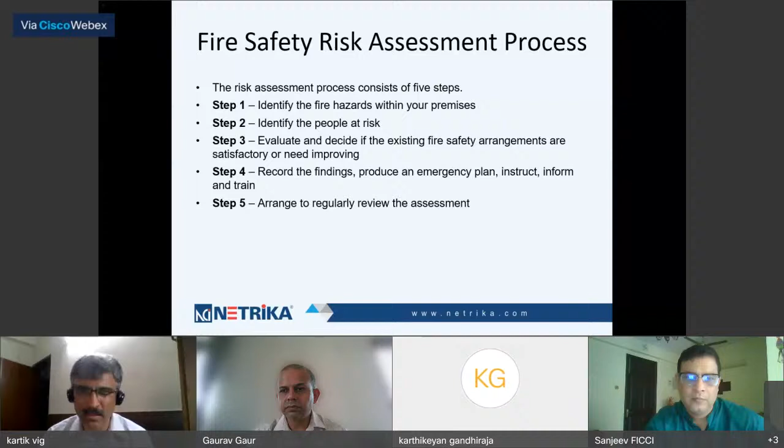Step 5, arrange to regularly review the assessment. So it's a misnomer that once an assessment has been carried out, it holds good for the lifetime, or maybe 10, 20 years, but it isn't so. We will look into how regular an assessment needs to be.

So let's look at this now. Step 1, what do you need to identify? You need to identify sources of ignition - what could ignite or cause an ignition, such as naked flames, heaters, or some commercial processes. Sources of fuel, such as waste products, display materials, textiles, or overstock products. Sources of oxygen, such as air conditioning systems or medical or commercial oxygen supplies. These are the things which you need to identify when going about identifying the fire hazards.

Later in the presentation I will cover the fire hazards, that's why I'm not going into details here. You must also consider structural features such as ducts and flues, unstopped holes cut into firewalls, large areas of combustible materials, open roof spaces, excessively long escape routes, etc. So primarily it is a mix of not only ignition, fuel, and oxygen, but also structural features which may help provide any of these three necessary elements, or otherwise.

Step 2, identify the people at risk. I've already elucidated this with an example. Just to run through the list - anyone who may be asleep on the premises, those present in large numbers, that's where PA systems, as Mr. Goel mentioned, is of utmost essence. We in the Navy - I think Gaurav mentioned it - compartments. So I will tell you about the drills that we do over there.

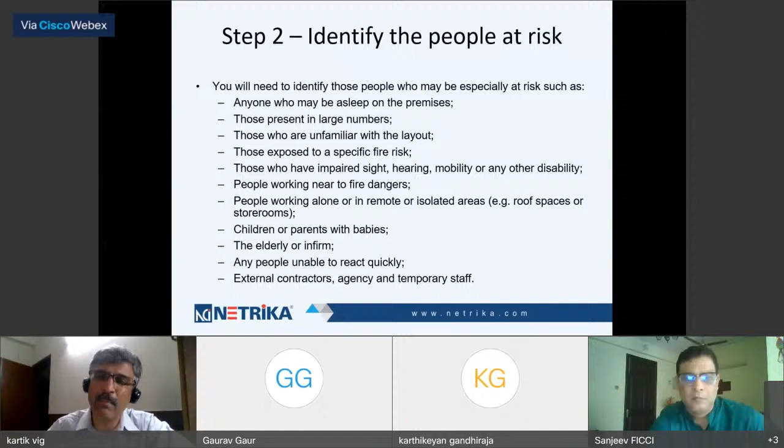So all these, this list is not a very complete list. It can never be. You can always add more to it. But these are the things that need to be considered, especially when identifying the people who may be at risk on your premises. Step 3: evaluate and decide if the existing safety arrangements are satisfactory or need improvement.

So here I've got a few sub-steps. The first is determining the risk of a fire occurring. How do we define that, and how do we quantify it, or how do we make it easier for us? Taking into account the fire prevention measures observed at the time of the risk assessment, it is considered that the hazard from fire, or probability of ignition at the building, is maybe low, medium, or high. So you could identify the risk of a fire occurring under these three categories: low, medium, or high.

Low could be hardly any risk from fire, few combustible materials, or no highly inflammable substances, and virtually no source of heat. Medium could be there are quantities of combustible materials and sources of heat, but a fire would remain confined or spread slowly. High is a serious risk to life from fire, substantial quantities of combustible materials, highly flammable substances, or likelihood of the rapid spread of fire, heat, or smoke.

Now, you must be wondering why it's important for us to categorize them. It is important because how we mitigate or provide mitigation for the identified risks would come out of this. What should be our stance? How much should you do? How much amount should you do? And what activities need to be taken to ensure or minimize the risk? This categorization will help.

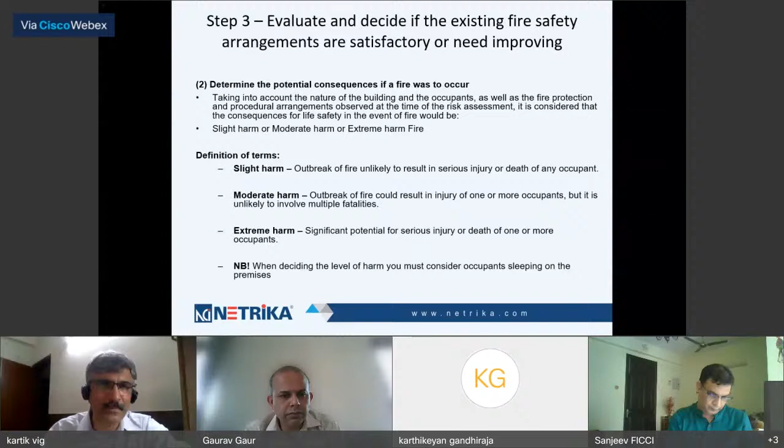So what you've done is that you have converted your identification of the hazards and their capability to cause harm into a matrix wherein you arrived at what kind of risk these pose to you.

Moving on to the next point under step 3, that is determining the action level and time scale. This is important because if you don't know if something is imperative and you don't put it under the imperative or important category, you will never get around to doing it. You'll not be able to prioritize, because the clearer your priorities are with regards to what actions need to be taken, only then can you act at the speed of light and actually save people in an emergency situation or a scenario where fire is causing threat.

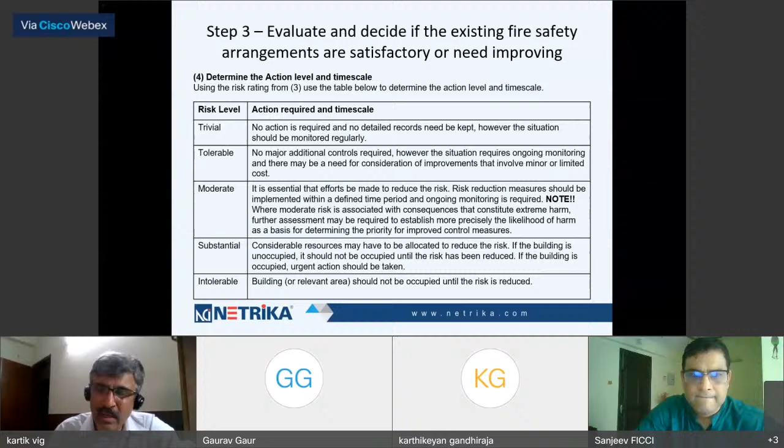Now, a defined time period is essential. You may have done a wonderful job, identified the fire hazard, identified everything surrounding that fire hazard and how detrimental it is, whether the risk is moderate or high - everything would have been done. You may have probably identified the action also which is to be taken. But if you don't identify the time period in which the action is to be completed, then that fire hazard will exist.

And why it is essential to identify the time period which should be covered, because in that interim period, when you are introducing the mitigating effort, at least you will be able to put on greater vigilance, or maybe change the process so that it reduces the threat because of the fire or the harm because of the fire.

So where moderate risk is associated with consequences that constitute extreme harm, further assessments may be required to establish more precisely the likelihood of harm as a basis for determining the priority for improved control measures.

This is also important - substantial: considerable resources may have to be allocated to reduce the risk. If the building is unoccupied, it should not be occupied until the risk has been reduced. If the building is occupied, urgent action should be taken. And if the risk level is intolerable, the building should not be occupied until the risk is reduced.

So this is how, when you have identified your risks related to fire, if you were to quantify them with regards to the risk level that they are associated with, you will be able to understand the action which is required automatically, and even the time scale and the associated cost with it.

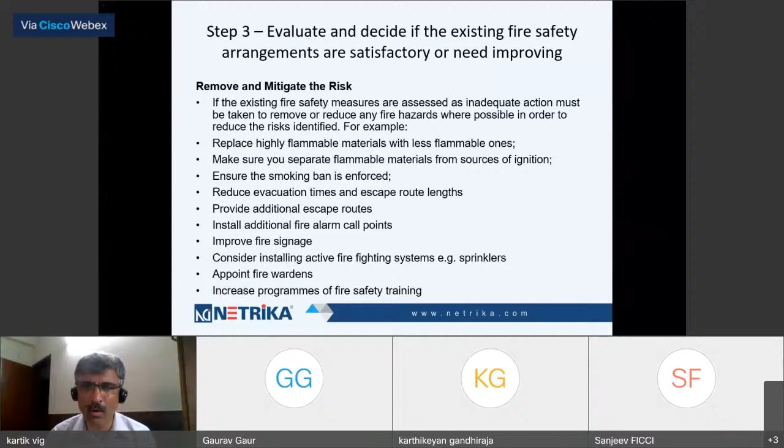Provide additional escape routes. Install additional fire alarm call points. Improve fire signage. Consider installing active firefighting systems, for example sprinklers. Appoint fire wardens. Increase programs of fire safety training. The list can go on, but these are just a few examples which I thought may help you.

Step 4 is second last: record the findings, produce an emergency plan, instruct, inform, and train. In this step, you must record, plan, instruct, inform, and train.

I'm not going to go into the details with regards to what is required over here, we all more or less should know. But records have to be kept, a proper plan has to be there, what actions have to be taken, SOPs should be there, instructions should be regularly disseminated, information should be shared on time, in time, real time, as the need may be, and training should also be a periodic affair which should be seriously conducted.

I was doing a risk assessment wherein fire safety was also a part of it, and the company is almost 30 years old. When you went about on the shop floor, what one found was that the training with regards to firefighting was being carried out periodically, but all the employees who were 5 years and above in the manufacturing facility would depute some youngster to go for the training, and they would eventually get trained. In the bargain, the senior lot had completely forgotten what exactly is a fire extinguisher or how it is to be used. So the training has to be periodic, and it has to be for everybody. Everybody should be a part of it.

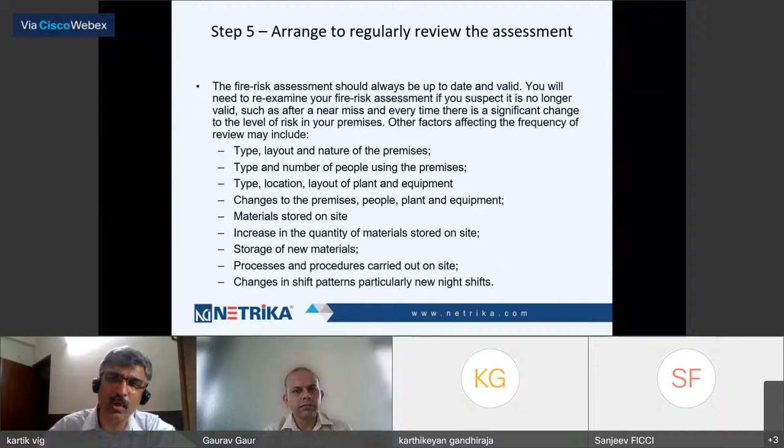This is interesting, we feel this has got nothing to do with it, but just imagine if more people start coming in at a particular moment of time or during a particular shift, you have a problem at hand, because in case of a fire, how are they going to be exiting, where are they going to be exiting from? Have you taken care of the extra bodies or footsteps of the people who are going to be on the premises? Will the fire safety stairways which are there be sufficient to take care of this? Do you need to have another plan in place? All these things would come back if you were to review the assessment.

Now let's look at the fire risk factors which I had mentioned.

There are a number of them. I have already mentioned a few. All of them form a part of the factors which can cause a fire risk. So although every fire risk assessment is unique, the following fire prevention and fire risk factors should be checked by the assessor as part of the assessment.

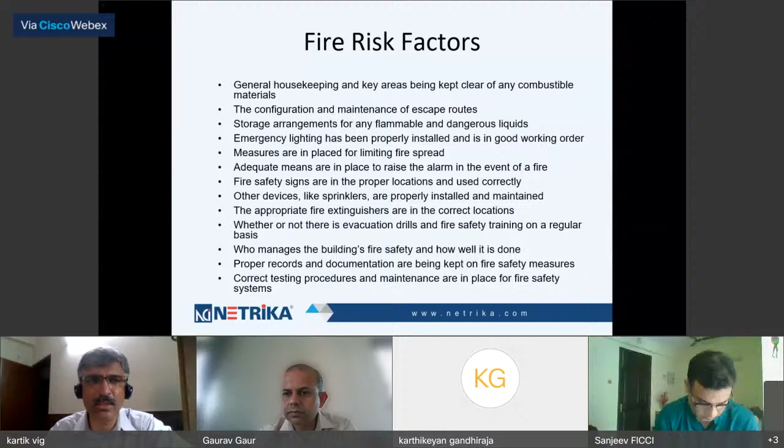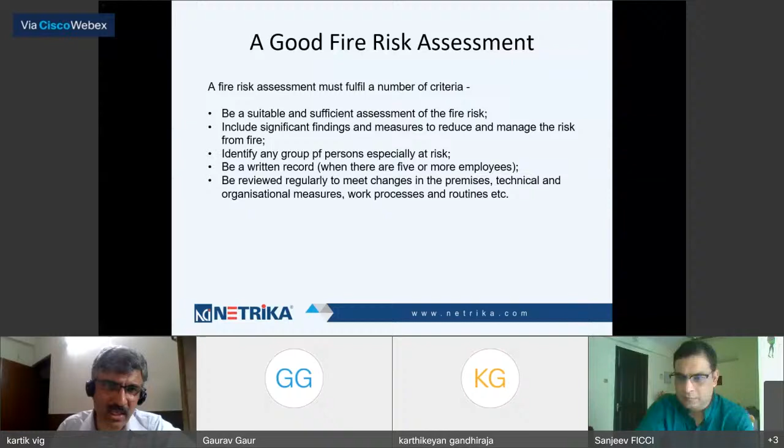Now let's look at fire hazard. When you're considering a fire risk assessment, it is useful to understand the definition of a fire hazard. Fire hazard has essentially two components which are balanced against each other: one is the possibility of fire occurring, and the other is the magnitude of the consequences that fire may cause.

I have elucidated this with two examples. A metal fabrication workshop has a high possibility of fire due to the cutting and welding equipment, but providing the housekeeping is good and no combustible substances are present, a fire is not likely to spread. So the consequence is low, and the risk can be considered normal or even low. From experience, I did an assessment in an area with limited movement space, full of metal machinery, with welding and cutting work going on, but everything there was metal, so the chances of combustible material being present was very limited. Even though there was hot work going on, the chances of fire taking place were low.

In the case of a cellulose paint spray booth, an occurrence is highly likely because of the products used and the equipment required for the process. The consequences are also very high because any fire would have a rapid development. Consequently, it would have to be considered a very high fire risk.

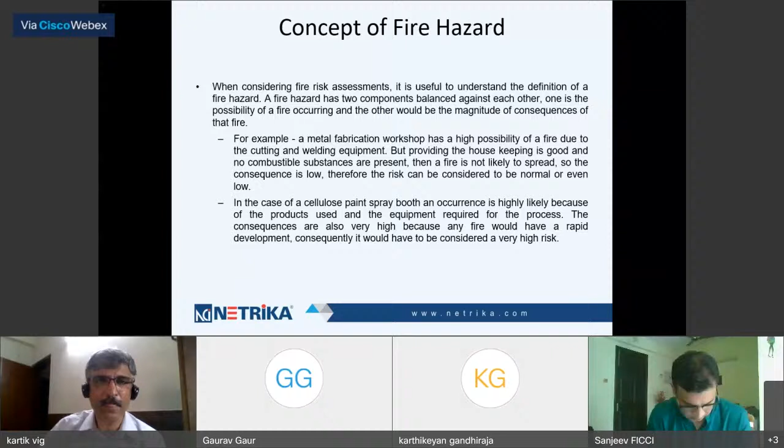So let's look at fire hazards. Fire hazards are workplace hazards that either involve the presence of a flame, increase the probability that an uncontrolled fire will occur, or increase the severity of a fire should one occur - such as flames, sparks, hot objects, flammable chemicals, and chemical accelerants, which can increase a fire's rate of spread.

I think I'm 5 minutes past my time. I hope you guys are not logged off and I'm just speaking without anybody knowing.

Elements of fire: oxygen, fuel, and heat. Why it is essential for us to know this is that when we are identifying fire hazards, anything which can generate or lead to or cause oxygen, fuel, or heat are the ones you need to look into when identifying your fire hazards.

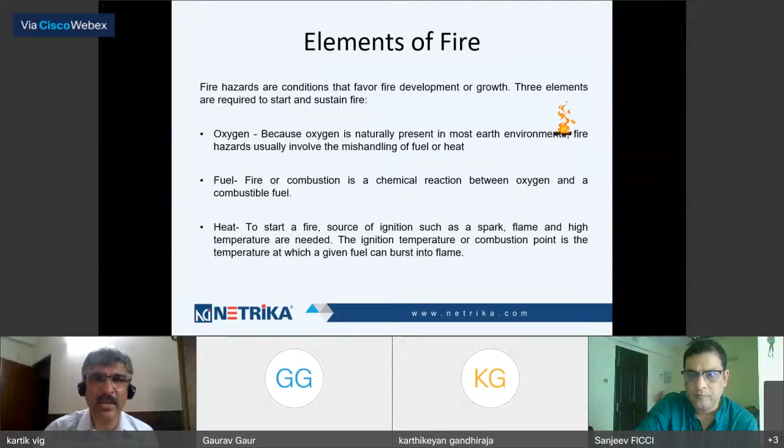I think this is the last slide, if I'm not wrong. Yeah, I think I've covered everything.

Yeah, Commander Vig, very interesting points. Some of them were really interesting, like keeping a list ready with you on the material which you think could be a possible fire hazard.

Also, I was thinking back of my mind when you were presenting this list, what about those things where you are not sure what kind of material is involved? When we talk about the general office scenario, there is an office with a lot of computers, stationery, electronic equipment, and other equipment, and you do not know which of those items behaves what in a fire scenario - like how a computer system will behave. So you are not very much sure which of those things will actually aggravate the situation, like some material which could actually blast due to fire. So those are other possibilities which will add to the complexity of the fire scenario.